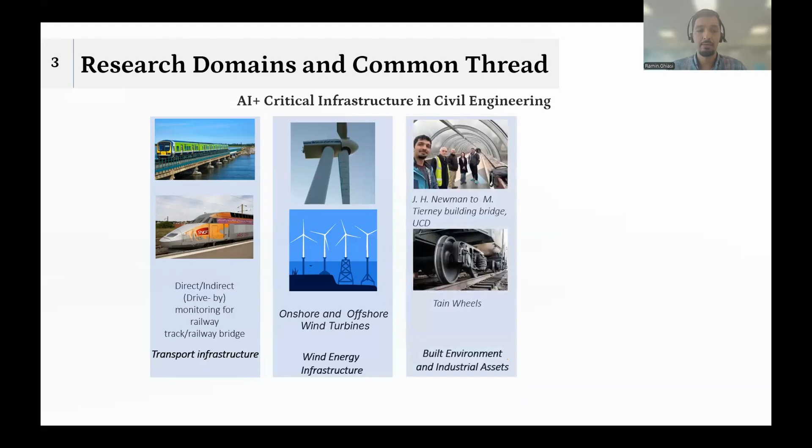And mainly it can be divided into 4 categories. Over almost 12 years of experience, I was working on different branches of structural health monitoring, such as drive-by and indirect health monitoring of infrastructures, and also direct assessment of transport infrastructures by installing sensors and some other devices. I also was working on wind energy infrastructures, developing methods and models for health monitoring of different wind turbines, both offshore and onshore. And also we extended our work to different buildings and also industrial assets such as train wheels.

And mainly I'm currently working on using data-driven methods and AI for intelligent transportation systems and traffic management, and how we can bridge the gap between the data and information that we have in a specific field and the knowledge of data science and data mining, and correlate these two branches of science to have better insight about the current or future state of our infrastructures.

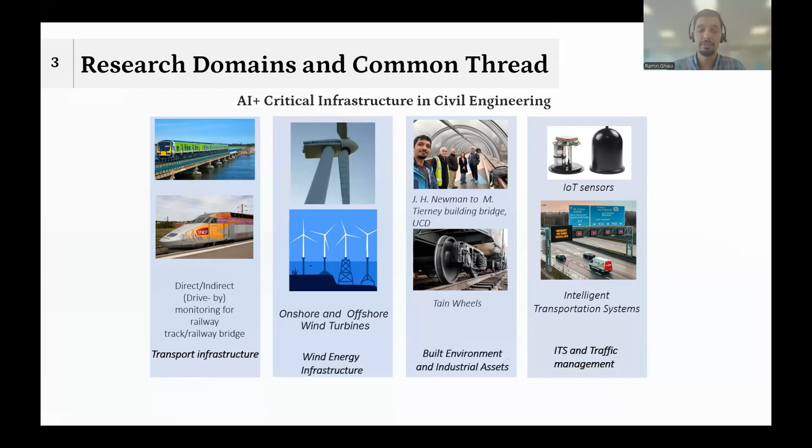When we are explaining AI, it will be better to first have a general understanding of the different steps that we usually have for using different data mining and AI models for infrastructure assessment. Generally, we can divide the process into 3 main steps. First of all, we need some data to be able to process and do some work on. Next, we need to create or select some model, link the data, and do some manipulations and processing on that data, and finally, when we have our model and our data, we can extract some information from the raw data.

In structural health monitoring or ITS applications, we usually have data that comes from different sensors that have been installed on a bridge or wind turbine, or it can be a sensor installed on a road for detecting the number of vehicles. In some cases, data can come from a finite element model or digital twin of the infrastructure or road.

I will go through some of the research work that I collaborated on or led during my time in UCD, and also some of the work that I am currently doing in R&D. It's divided into different categories that I've shown in slide 3. I will start with transportation infrastructures, and specifically a project that we had for railway track monitoring.

As our goal was to assess and see how we can use data for knowing the condition of railway tracks, we used two different data sets, and we were collaborating with two different organizations.

First, one of them was a railway track company in Pittsburgh, where they recorded a series of data from a set of sensors that was installed on a train, and it traveled around 42 kilometers of road near Pittsburgh, and it recorded acceleration response data on the train, and the sensor position can be seen on the train.

And the other data set that I was working on was related to another project with a railway company in France, where they installed different sensors on a train, and this train was moving around the high-speed network of France and was recording acceleration response data and some other data. And the main goal was to use those data, which was a massive set of data, for detecting the condition of the track, for example, geographical and different geometrical defects that we can have in track.

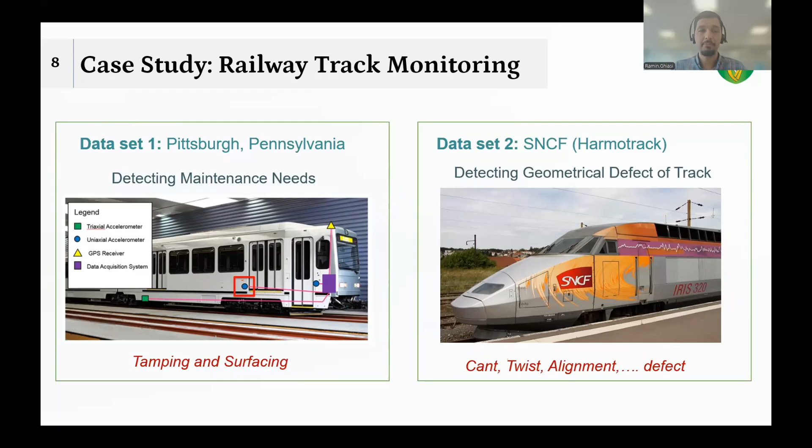As I mentioned, the first data set was the DR-Train data set, the data set that was from Pittsburgh. And in that data set, we have data from 3 types of sensors. Some of them were triaxial accelerometers, some of them were uniaxial sensors, and some of them were data from the maintenance activity that has been implemented on that section of the road. The goal was to somehow correlate the data that we have from acceleration sensors to maintenance activity that is needed for that section of the road.

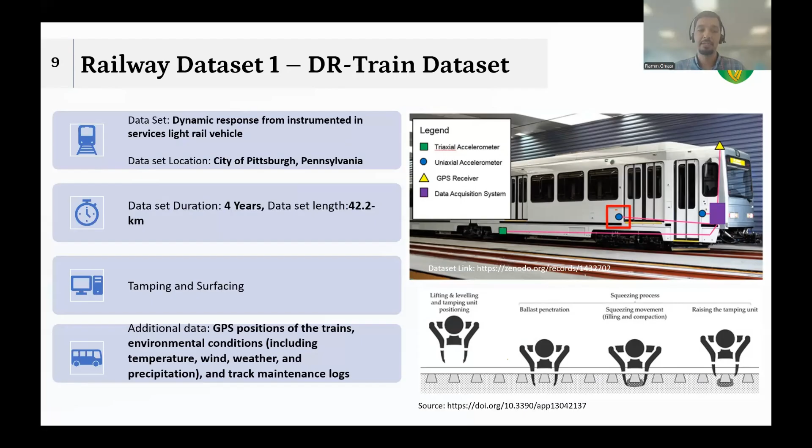Different maintenance activities can be done on railway track, but our focus was on tamping and surfacing, which were two main maintenance activities that have been done by the contractor on that road. We had raw acceleration response data from the sensors that I mentioned, and the idea was to extract different features in different domains and see which feature set and which characteristic of acceleration response can be used for predicting the maintenance need of the railroad track.

We went with different domains, I mean here time domain, frequency domain, and time-frequency domain, and we extracted a pool of features from each of these domains, and then we implemented some feature selection algorithm and feature classification. And in this case, we used classical machine learning algorithms such as random forest and also convolutional neural network.

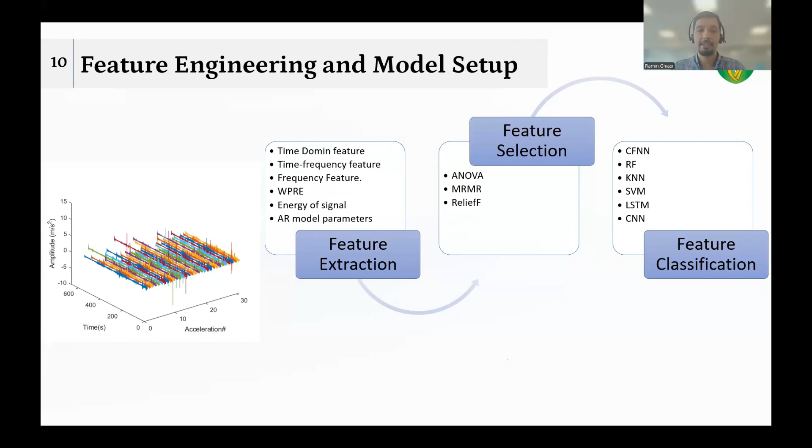And at the end, we were able to detect the maintenance activity a month before a real maintenance activity had been implemented on the road. I mean, there were some signs in acceleration response data before the actual maintenance became obvious for the day-by-day users and for those maintenance teams. So we were using those signs and those features for detecting the maintenance needs of the road.

We went on comparing different feature sets, and the result was showing that if we go with statistical features such as, for example, maximum of acceleration response data, minimum of acceleration response data, standard deviation, and some other features, we can expect a good accuracy in detecting maintenance need of the road.

We expanded that work, and went to try to see if there is generality between a methodology that we developed for that specific road in the US and another project and another railway system in France. And there was a 3-year project called Harmotrack, and they were recording a set of data from all the railway network of France, the high-speed railway network of France.

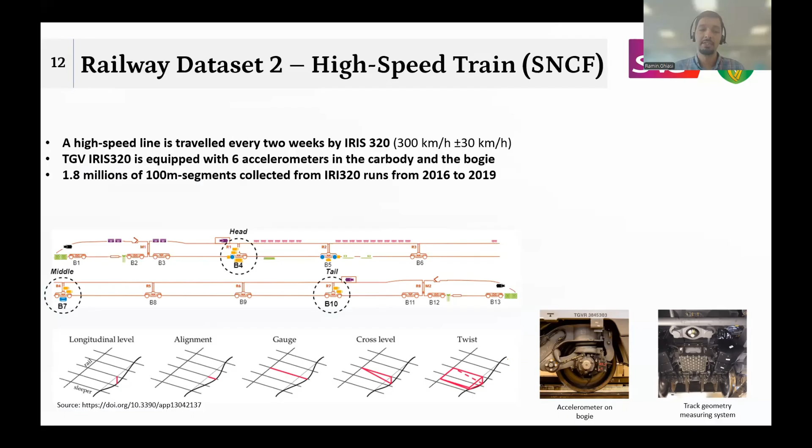And we fused and merged data from two different data sets. One data set, as I mentioned, was acceleration response data, and another data set was data that we have from that geometry measurement device, and we combined them together to see if there is any correlation or any other sort of relationship between a specific type of geometrical defect and a specific change in acceleration response data that we can have from the sensor that is installed on the train.

For our first work, we developed an unsupervised anomaly detection model that was capable of detecting and informing us about the state of the track based on input acceleration response data. It was able to tell us, based on acceleration response data and the features extracted from it, whether the current segment of the railway track is healthy or there is some problem with that section of track. And that was a starting point for us working on this data set.

And then we expanded that idea to some other railways in the same country. Usually when we develop an ML model, it is very good for a specific set of data and for specific loading, geographical, and environmental conditions. But when we want to transfer the knowledge from the first model to a new similar project or similar railway track, usually the ML model does not show a good result, and we need to go with some other approach.

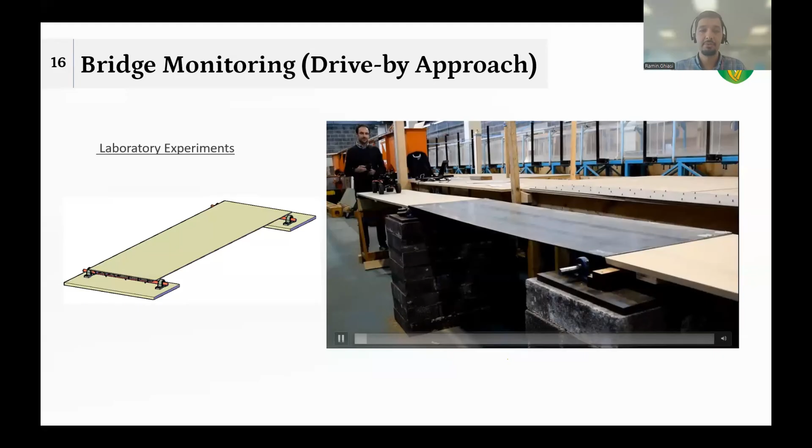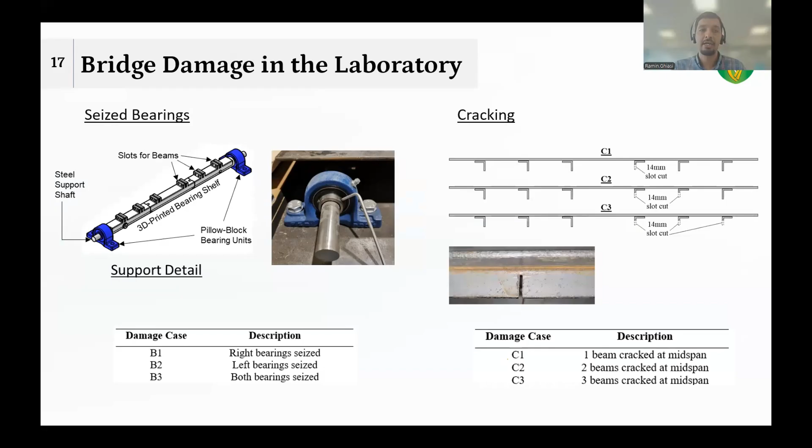As you can see, the main bridge was a one-span bridge where a toy car traveled across it, recording acceleration response data using sensors mounted on the toy car. Sensors were installed on the axle and also the bogie of the car. When it was traveling across the bridge, it recorded acceleration response data from the interaction of the tire and the bridge surface. We used that data to detect different conditions of the bridge, such as seized bearing and cracking.

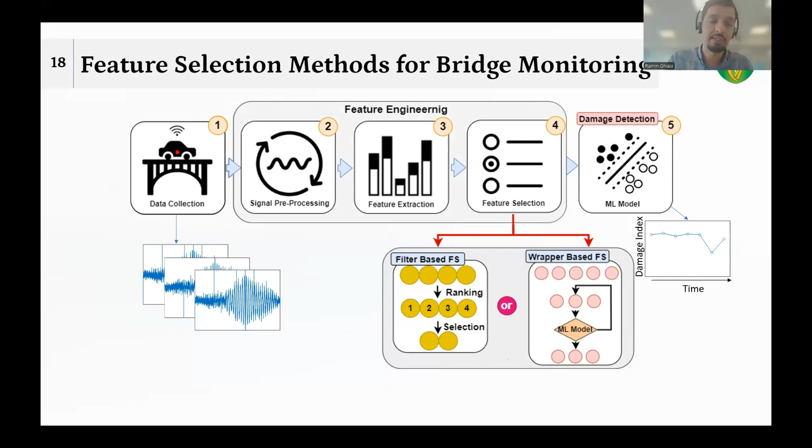We developed a methodology for doing that. We have the acceleration response data, and then we use feature engineering to extract features from the raw acceleration response data. Then, to select the most suitable features for detecting cracks or seized bearings on the bridge, we went with different feature selection algorithms. I don't want to go into detail, but in this case we tested more than 35 different combinations of ML model and feature selection method to find the best one for damage detection on that laboratory bridge.

The final thing we figured out was that if we select a good amount of engineered features that carry some knowledge of the structure, it doesn't matter what ML model we are using. Specifically for shallow models such as neural network, support vector machine, or k-nearest neighbors, if we have good features and good input, in most cases the accuracy is more than 95%, which is acceptable by engineering principles.

We also did sensitivity analysis on different sensor locations to see which can be the best feature set for our case, and sensors closer to the bridge, specifically those installed on the axle, have more sensitivity to damage on the bridge.

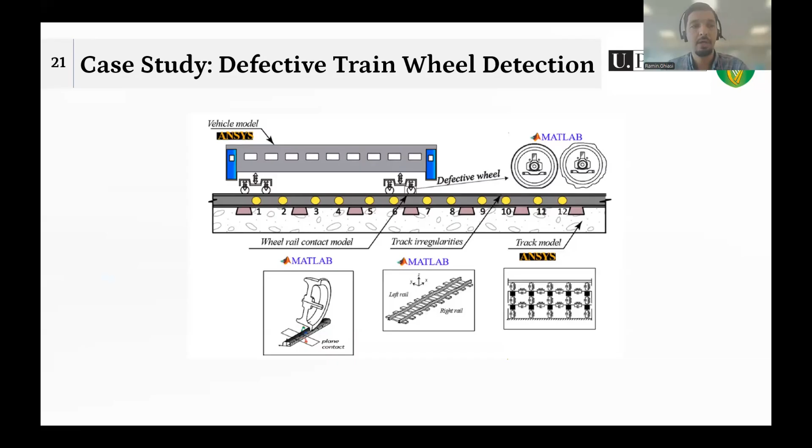So the idea was to see if we can use acceleration response data that we can record using a series of sensors on the track for detecting the condition of the wheel. You can see those sensors shown there in yellow, and then we use that as input of our model. We tested and developed a framework for feature extraction from raw acceleration response data and developed an unsupervised model for detecting the condition of the wheel flat.

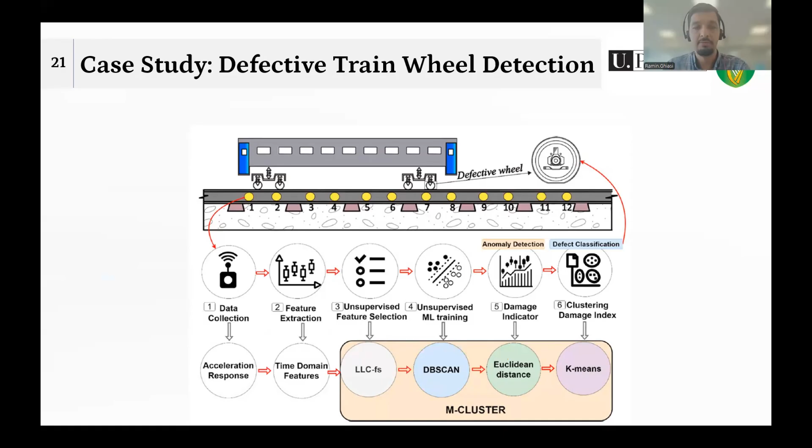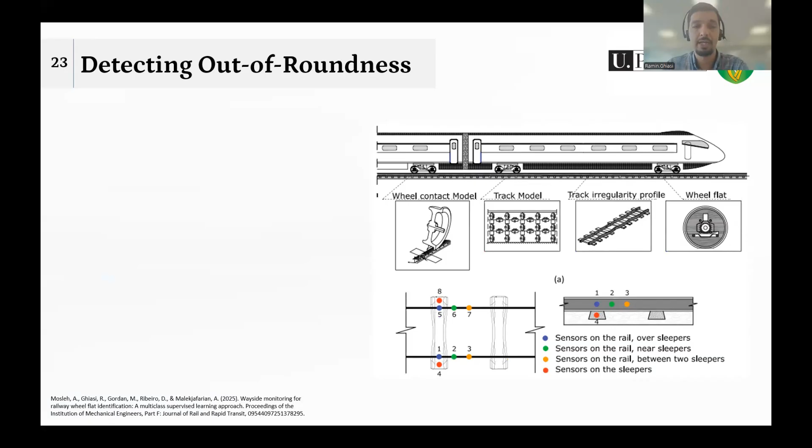And results show us that we can detect different classes of wheel flat with acceptable accuracy, and we also extended that to a different type of train, I mean passenger trains, with a different sensor setup. And the idea was to see if we can have a good understanding about the condition of the wheel based on sensors that can be installed on the track or on sleepers or between these two.

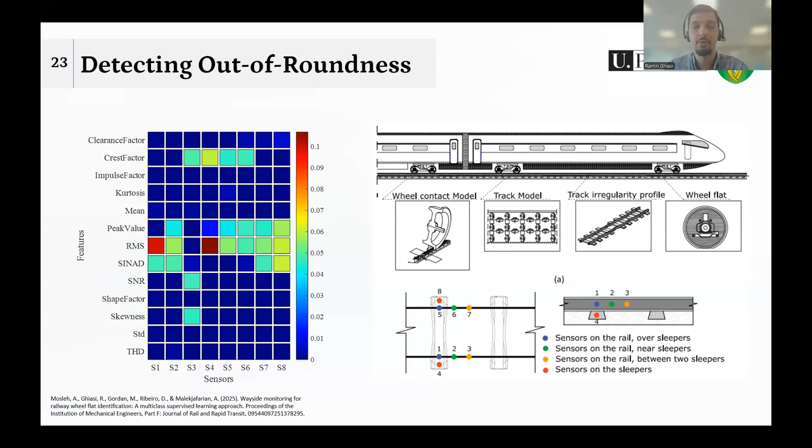And results show us that by proper feature engineering and selecting the best features, we can select each of those sensors. The location of the sensor is not very critical, and the most important part is to have a good set of characteristics from the raw acceleration response data that can be used as input of our ML model. That was a very compressed summary of some of the work that I've done on transport infrastructures.

But as I mentioned in the beginning, my goal was to see if we can go with different disciplines of civil engineering and different disciplines of engineering, for example, in the field of infrastructures. And we tested some of our ideas in wind energy infrastructure. During the time that I was working in UCD, I had the opportunity to collaborate with a very talented group of PhD students. And with each of them, we tried to look at the problem from a different perspective. I will show some of the work that we have done and the projects that were mostly led by the PI and the leader of our research team, Dr. Malekjafarian.

In the first work, the goal was to detect the scour depth around the monopile of offshore wind turbines using sensors that can be installed on the tower of that wind turbine. We went with similar accelerometers installed on the tower, and then we used those acceleration response data as input of our models. Somehow, all of my research work is focused on using acceleration response data and, in some cases, strain gauge data for detecting the condition of structures.

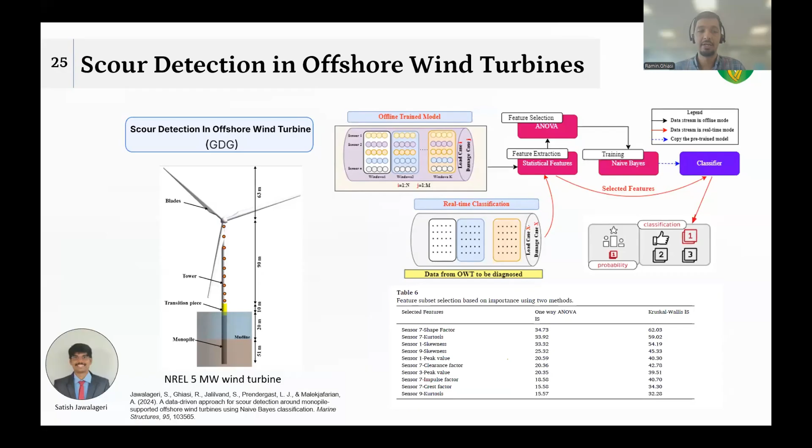When we have that acceleration response data from the tower of the wind turbine, then we can develop a methodology for detecting the scour depth. And we figured out that if we select statistical features, such as, as I mentioned, time domain statistical features, we can have good accuracy in detecting different scour depths, and specifically we can choose a set of sensors that give us better sensitivity and better detectability for scour depth. And in our case, the sensor that was closer to the sea level had higher sensitivity to scour depth.

In another research project, I was working with a PhD student in our group, Mahdis, who was working on the idea of how we can detect the crack and the length and type of crack on a specific type of wind turbine by placing sensors on each blade. Specifically in this case, 12 sensors were installed on one of the blades of a wind turbine, recording acceleration response data in different conditions with different wind speeds, and we were using that data as input of our detection model.

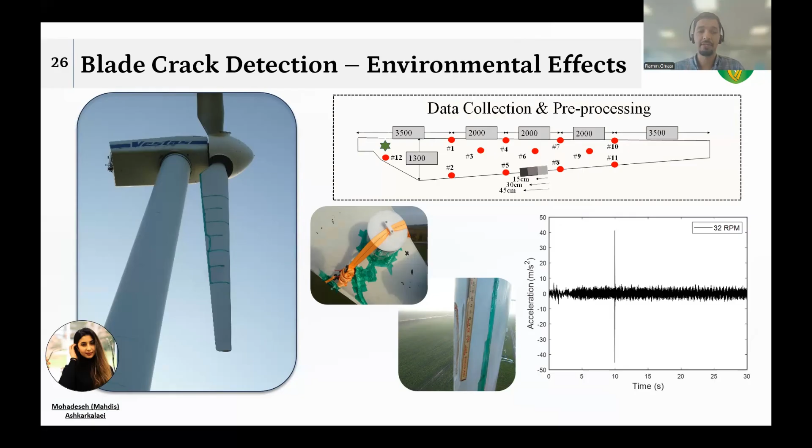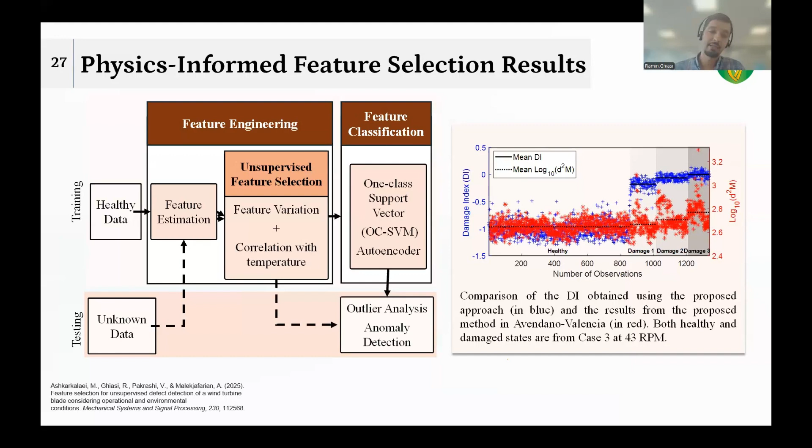One of the specific challenges for that project was that acceleration response data is very prone to environmental conditions, and sometimes the change that you can have in acceleration response data is dominated by environmental conditions, for example, heating and freezing. So we developed a methodology for removing those influences and selecting the features that have less sensitivity to environmental conditions and higher sensitivity to the crack length and depth. And more detail about that methodology can be seen in the original paper.

I also collaborated with another PhD student in our group, Theo, where we tried to develop a methodology for detecting different events for a specific SHM challenge. That data set covered three types of fault, and the idea was: can we detect, for example, pitch drive failure a day or two days before real failure based on acceleration response data and based on the sensors that were installed on different parts of the

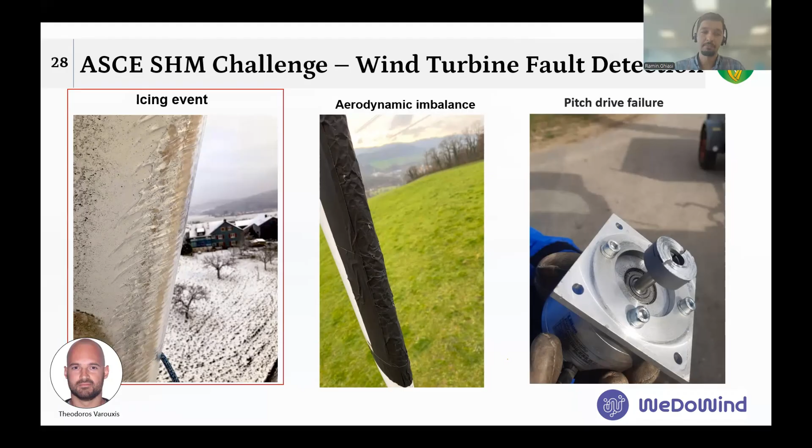wind turbine. You can see some of the sensors that were installed on the main shaft, and we developed a system that extracts features from raw acceleration response data and uses them as input to a clustering model. In all three cases, detecting pitch drive failure, aerodynamic imbalance and icing events, it showed good and acceptable accuracy in detecting the event.

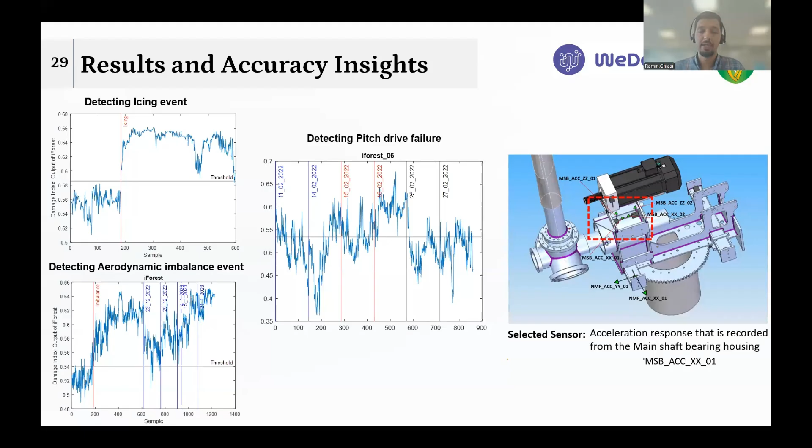The final project that I want to show from the time that I was working in UCD is a project that started almost two years ago with another PhD student in our group, Mahmoud, and the goal was to see if we can transfer the knowledge and information that we have from one wind turbine to another turbine in the same farm, or in some cases to another farm.

As I mentioned in the beginning, most ML models are very good when you are working with them for a specific example, for example a specific wind turbine, a specific train or a specific bridge. But when you want to map the information that you learn from one bridge or one turbine to another turbine, in most cases we are facing lots of inconsistency and low accuracy, and that is one of the main challenges in the structural health monitoring discipline.

Different researchers go with different ideas for solving that, and one of the well-known approaches is population-based structural health monitoring, where we are trying to find a common space between different structures and train our algorithm based on that common space instead of going for individual structures.

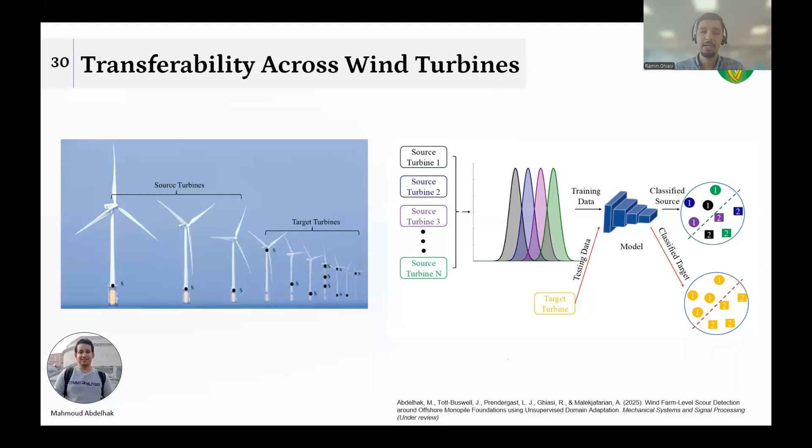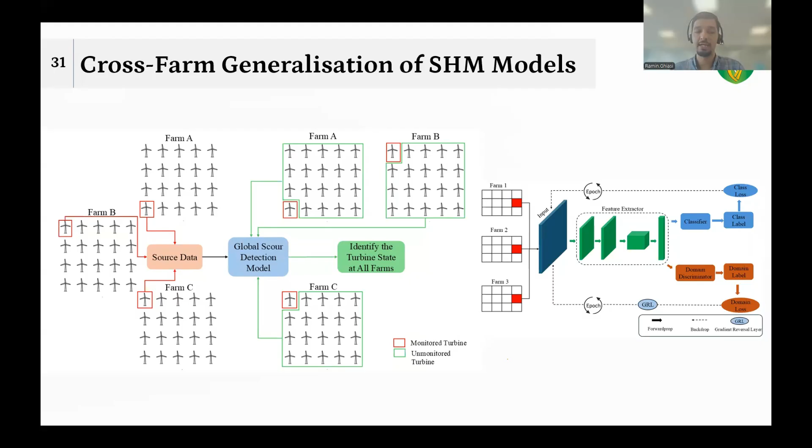So in this series of work, we went with the idea of transfer learning between different wind turbines, and we tested and developed different algorithms. At the end, we figured out that with frequency domain features, we can have acceptable accuracy in detecting scour depth in different wind turbines in the same farm, and also we can map data to wind turbines in other farms by using knowledge transfer and domain adaptation techniques.

Another branch of work that I was working on, and which is currently my main research work, is how we can use AI and data mining techniques for solving some of the challenges that we have in transportation, specifically for ITS and ITS infrastructures. That field of work started almost three years ago, when I went to the Czech Republic for a month and was working in CDV in Brno on a specific project.

The idea was that at that time they were trying to study the use case of a specific sensor developed by their team for detecting the number of vehicles, the type of vehicle and the flow of vehicles, based on a very small IoT device with good battery life which can be installed on the road. The background and methodology of that sensor is similar to a loop detector, which works based on magnetic field, but is more condensed.

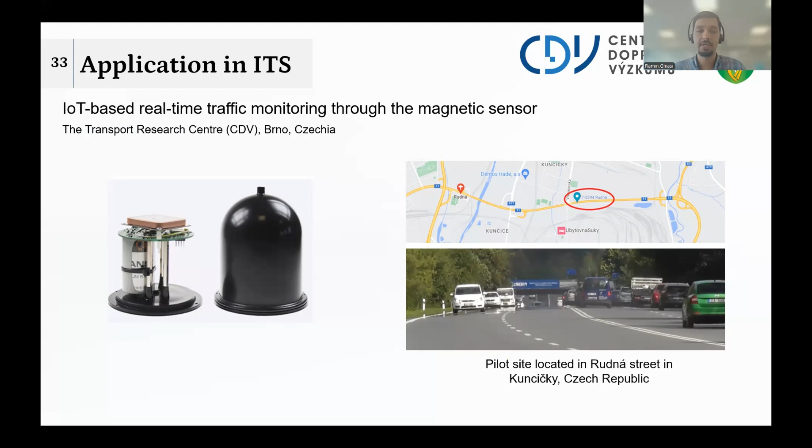The main challenge was how we can improve the detectability and classification performance of that type of sensor for knowing the number of vehicles and the condition of the vehicles. Based on my previous experience working with raw data and fusing different data, I was trying to explore different characteristics of the raw magnetic data from that sensor, and find a correlation between those features and different vehicle classes, for example bus, car, HGV and van, to find a better match between them.

We also compared our algorithm with the classes that we have from the camera, and the result was quite good. It showed up to 8% increase in classification performance compared to what they had done before, and it was the start of some other projects with CDV.

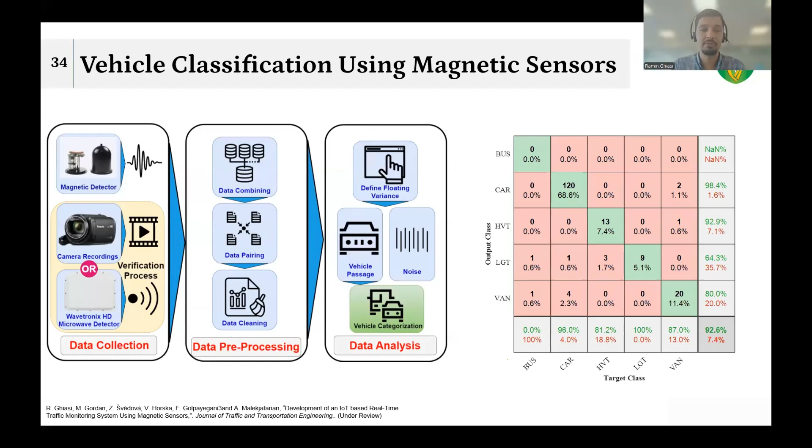Also, in another project with my colleague Amirreza in UCD, we were trying to find a way of predicting travel time using data from AID and TMU, or those loop detectors on the M50. The idea was to find the best set of features for predicting travel time from a pool of features that we can have.

We can go with the number of vehicles that we have on a specific section of the road, or with the day or the time of day that we want to predict for, as input for predicting the travel time of vehicles on that portion of the road.

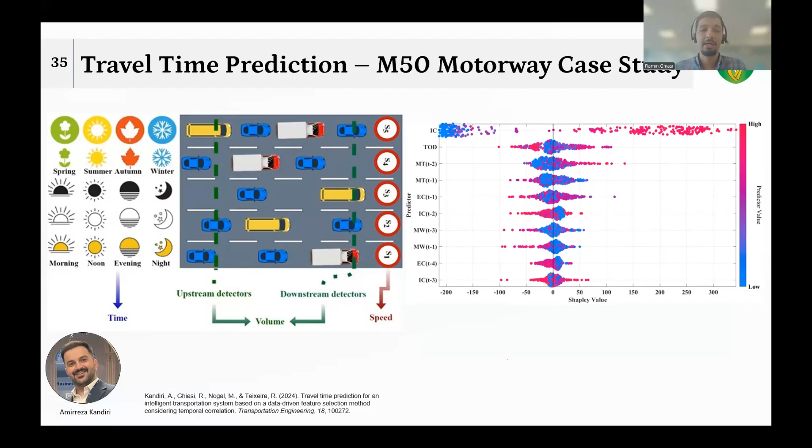Or we can go with different weather conditions, different types of vehicle, and with a speed that is set and has been shown to drivers. And at the end, we developed a methodology and a framework for feature selection, and we figured out the most important feature for predicting the travel time is the number of vehicles that we have on that segment, and that can be used in an appropriate way for predicting the travel time for each segment of M50. That was my starting point of my work related to M50, which is the busiest motorway in Ireland, but it was not the last project.

As I mentioned, from 2022, I moved to Roughan & O'Donovan, which works on different aspects of the civil engineering discipline, but I mainly work on a specific project called EMOS, which is an abbreviation of Enhancing Motorway Operational Service, with the goal of improving the driver experience when they are driving on M50 by showing a good speed and cautionary speed to them, and also giving them more information about the condition of the road, about the number of incidents that happen, and so on.

One of the challenges for this work is that we have data from different sources. I mean, we have data from, for example, emergency services that go and respond to any incident on roads. We have some information from sensors that have been installed on the road for detecting the number of vehicles, some ANPR cameras and CCTV cameras, and also some weather stations that are used for knowing the condition of the road and the weather condition on each section of the road. We also have some information from operators in the control center that assign a speed for different sections of the road, or those advisory speeds for drivers.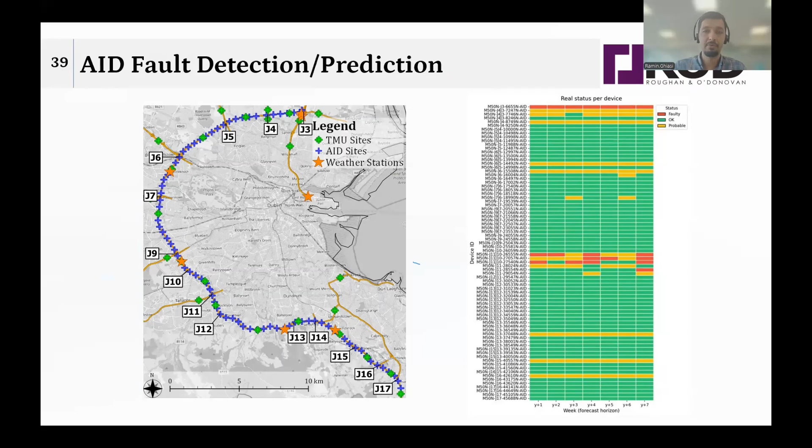But one of the challenges from an asset perspective is that those sensors can sometimes show faulty data, and we developed an approach, first of all, for detecting those faulty outputs of the AID sensors, and also for predicting the upcoming faults in different batches. For example, in the next 7 weeks, what is our expectation about the number of AIDs that will have some fault and how we can approach them. That was some of the work that I'm currently doing related to ITS.

As can be expected, I also work on some projects related to structural health monitoring. I don't want to go into detail because in the first part of the presentation I gave a good part of my presentation to structural health monitoring, but just to acknowledge the work that has been done by our team for a specific project, we developed a platform for

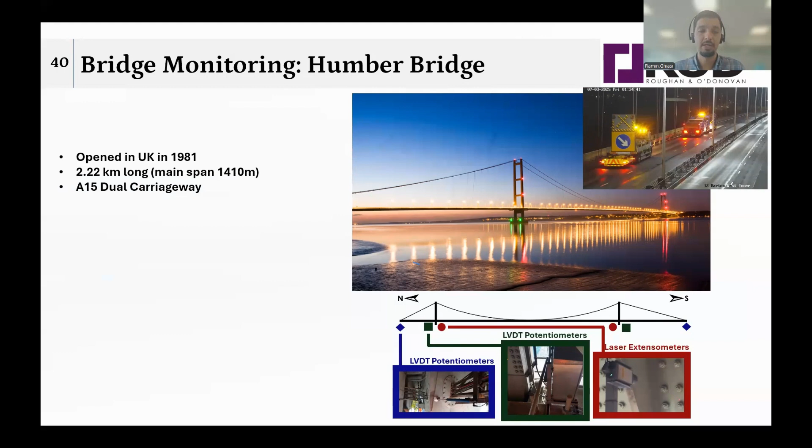health monitoring of the Humber Bridge in the UK, where dedicated software was developed for showing the current condition of the bridge based on sensors that have been installed on the bridge, and also being able to monitor the condition of the bridge when a specific load test is running on the bridge.

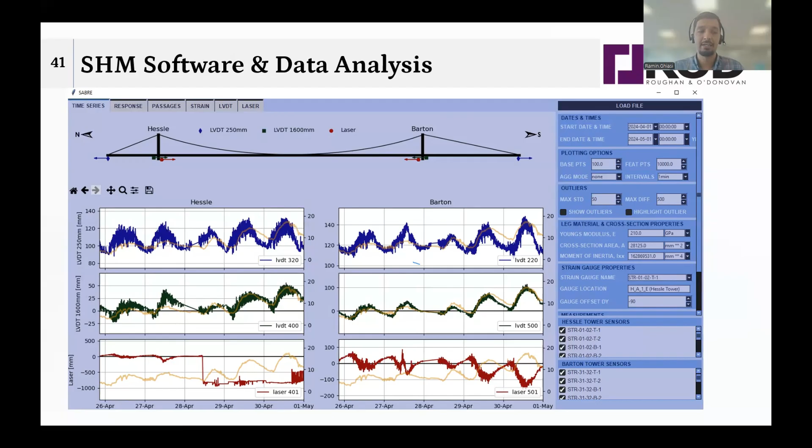Specifically, one of the challenges for this project was the amount and the frequency of the data that we have, and our team developed a dedicated pipeline for reducing the size of data and being able to plot data in different ways and see correlation of data with any temperature condition and so on.

At the end, if I want to summarize what I mentioned, I started my research project and my work in ROD with some questions on how we can correlate civil engineering and find a connection between civil engineering and data mining. And I tried to develop different methodologies for different fields of civil engineering, transportation, wind turbine, and also ITS.

And one thing that I figured out is that when we have data, the most important part is to select a suitable set of features that can be used for different ML models and data mining techniques. And if we have a good understanding about the physics of the problem, we can expect to have a good output from our ML model.